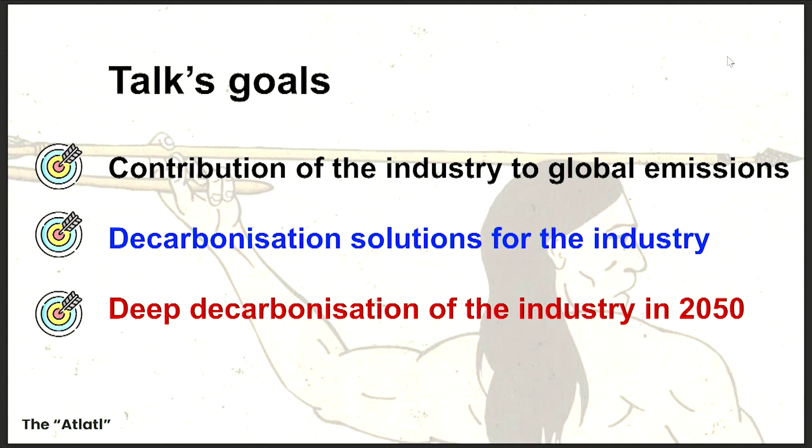In order to decarbonize deeply the industry, specifically in Europe, we need to think about other possibilities, not only applying renewable energy solutions, bio-based solutions or thermochemical solutions, but also thinking about what to do with the carbon that has to be removed or captured and converted into something of use. I will focus here especially on a few synthetic fuels.

I have included only two slides about what we do at CIRCE. I come from a technology center located in Zaragoza, Spain, but we also have presence in Brussels, as you might expect, in order to attract funding for our activities. We also work in different countries, especially doing projects for knowledge transfer to companies and other entities.

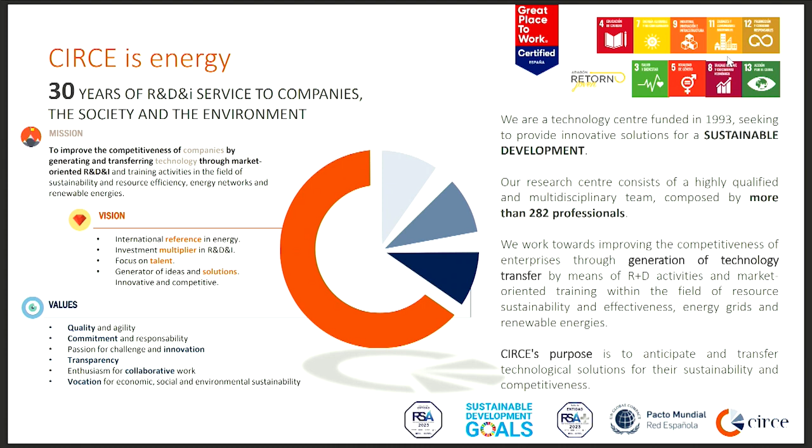CIRCE can be described as a very young research center, but we have, I would say proudly, a good history in technology transfer. That is our main essence. We identify technologies that are able to help the industry, mainly in Spain, as you might expect, but we also work with other companies in Europe.

What we do is mainly focus on three different activities. So as you know, we do some research. By doing this research, we produce knowledge that we can transfer afterwards to companies especially. And of course, we do an education part, in which we provide knowledge in different seminars or conferences like this one.

Just two slides about the project that is the main basis of this talk. The RE4Industry project is focused on identifying different renewable technologies to decarbonize the energy-intensive industry. It is a European-funded project, and as you might expect, since we are at this symposium for biotechnology engineering, many of the solutions useful for the industry are renewable solutions available right now, or that might be available by 2030, for the industry to decarbonize its processes.

When I say decarbonize, I refer to those processes that the industry uses and that require electricity and heat, which usually comes from fossil fuels. So the project is mainly focused on these different aspects, and we have conducted an analysis to see how the different renewable technologies you can see on the slide are available for the industry.

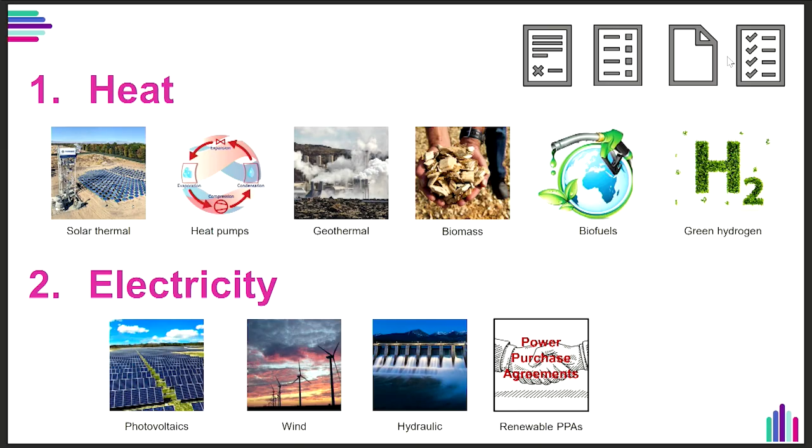We have also published a few results on this. As you might expect, we are considering different industrial sectors. Afterwards I will show a few slides on the most CO2-emitting sectors, but we have mainly focused on the steel and cement sectors. I will also show a few examples of how these technologies are applied in the steel sector, especially how CO2 can be captured in these sectors and converted into useful synthetic fuels, which are currently being produced at a few exemplary companies.

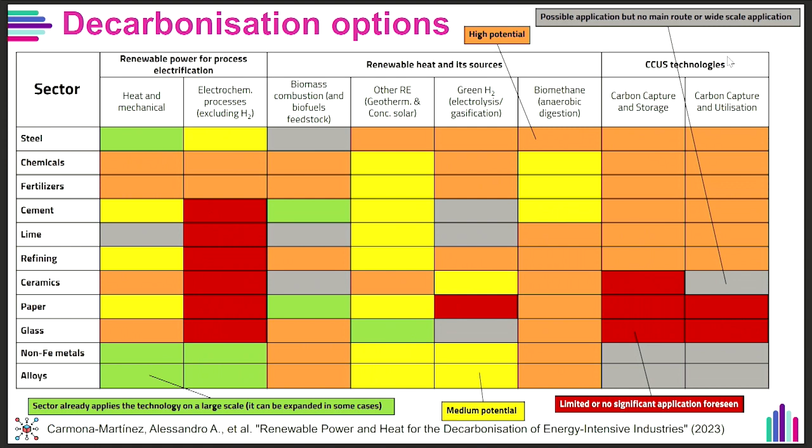This analysis is already available. You can download it and see the roadmaps that we have been analyzing in the project, and how the project has helped us to suggest identified roadmaps, or a group of solutions, that the industry will require in order to decarbonize the different industrial processes.

I will also start by giving a simple classification of different pathways for CO2 use. I'm aware that you are familiar with many of these technologies. Once the CO2 is captured, it can be used in multiple processes.

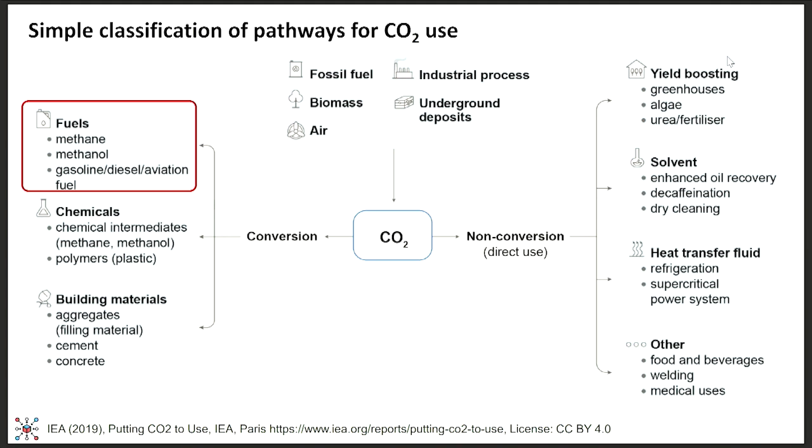The CO2, without any additional conversion, can be used, for example, in the food and beverage industry. We are aware of these applications, but carbon can also be converted to give additional value, and I will focus especially on a few of the synthetic fuels that can be used and are already being produced at the industry.

Of course, we have very interesting applications focused on the production of other types of chemicals, other types of bioplastics, for example, or also building materials. But these applications are out of the scope of this talk.

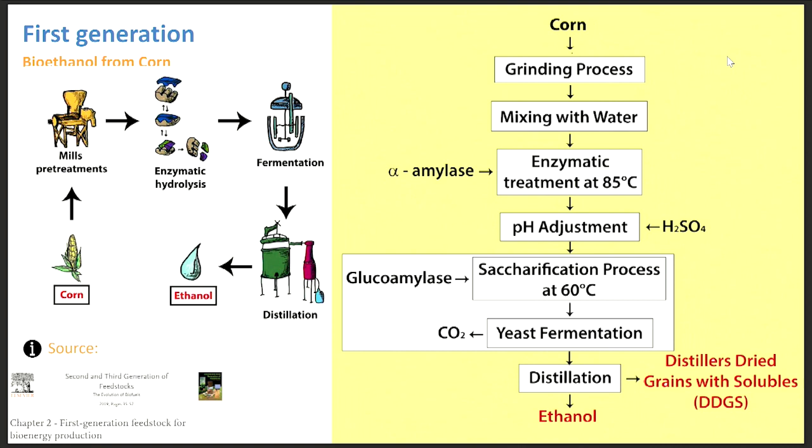It's something that Europe is trying to avoid in the following years. It is hard to do, but something that can be achievable. As you might expect, these biofuels have a dilemma of whether you produce food to feed the people, or you produce food crops to feed our cars. So this is the main dilemma of the first generation of biofuels.

Therefore, we need to focus on other alternatives for biofuels. There have been several talks today regarding the production of biofuels from biomass or from other industrial waste that can be converted into biofuels. However, as you might expect, CO2 can also be a good source, a good feedstock for biofuels production, and also for fuels that can be produced with thermochemical processes.

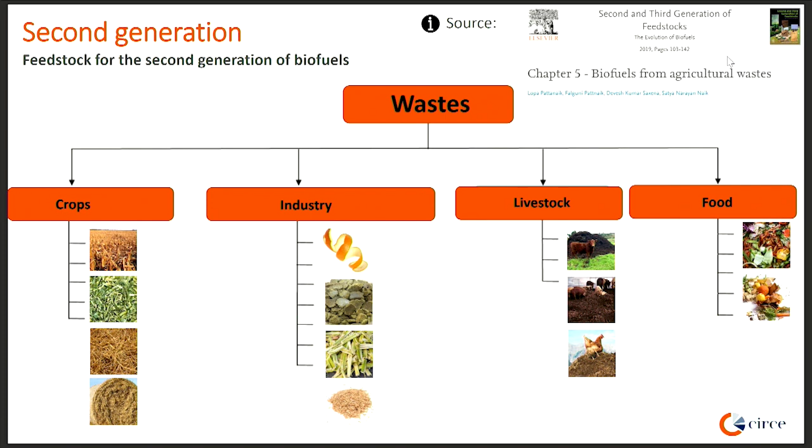For those who are not familiar with this second generation of biofuels, but I'm aware that many of you are, biofuels can also be produced from multiple wastes coming from crops, industry, livestock, and food. We have seen talks today coming from hydrogen, coming from food waste, biogas coming from sludge. So this could be the second generation of biofuels identified in this scheme.

Regarding the different technologies available for this biofuels production, we have biochemical conversion. We have seen as well a few talks for the production of hydrogen, biogas, and other types of fuels. But we also have other thermochemical conversion processes already available for the industry to use waste for the production of fuels.

Eric Travely told us a few hours ago regarding the gasification of biomass, if I remember correctly. That is a quite interesting option to produce hydrogen from biomass waste, agricultural waste, not to use biomass that can be used for other types of applications, but the option is there.

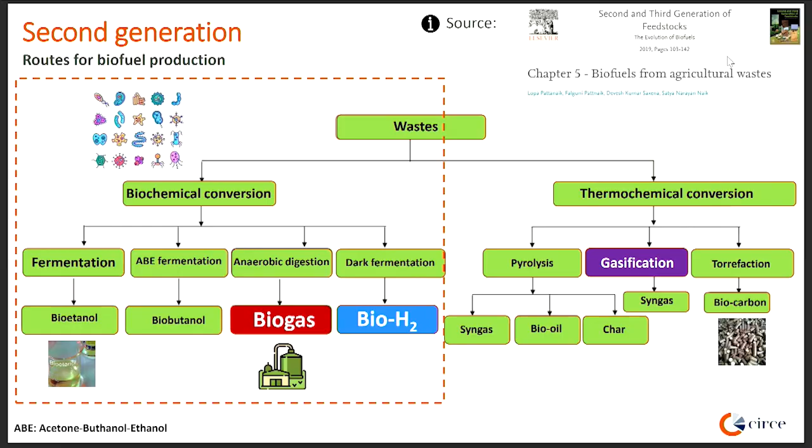Regarding another definition of more advanced biofuels, we have multiple microorganisms that can be engineered, modified in order to obtain biofuels or bioproducts. I will focus mainly on the biofuels that can be used by utilizing microorganisms and CO2 as a feedstock, which is, as I said before, an alternative for the industry to decarbonize its processes.

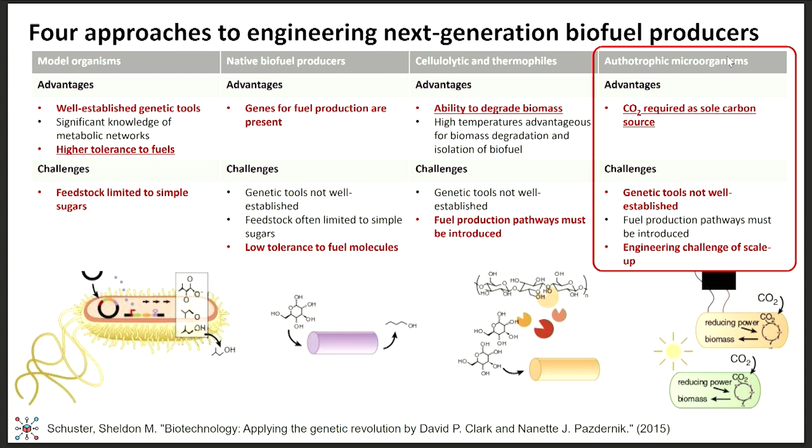So here we have an opportunity because genetics tools are not yet well available, but they can be developed in the following years. There also seems to be an engineering challenge for the scale-up of the technology, as Eric Travely mentioned before. But I will show you afterwards a few examples of how this has already been achieved and how we can all together put our efforts in order to bring this technology for industrial application.

I have to say that what we have analyzed in the project is mainly focused on Europe, but I'm aware that multiple regions in the world have the same problem, although they might tackle the situation in different ways. But the information that I will show you is mainly focused on Europe.

As you can see, the European Union has a very well established strategy in order to decrease these emissions by 2030 first, and by 2040 and 2050. So the European Union, for those who are not familiar with this, has set very ambitious goals in order to decarbonize completely its activities by 2050.

This is quite a challenging task because the technology is not yet available in order to accomplish this, but we will try to do it all together with solutions presented here today.

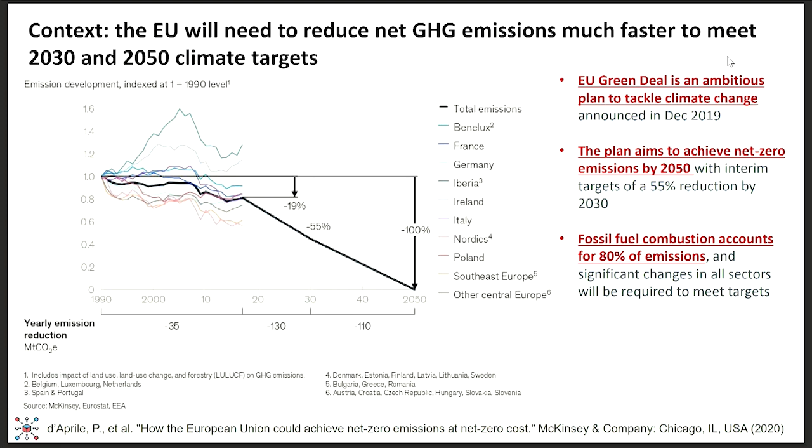As I said before, the different sectors in our daily life contribute to these emissions. What you see in the slide are the emissions from 1990 to 2019. As you can see in Europe, they have been decreasing slowly, but there is still plenty of things to do.

This project is focused on how to tackle the emissions from industry, especially energy-intensive industry. These are steel producers, cement producers, aluminum producers, and also the chemical sector.

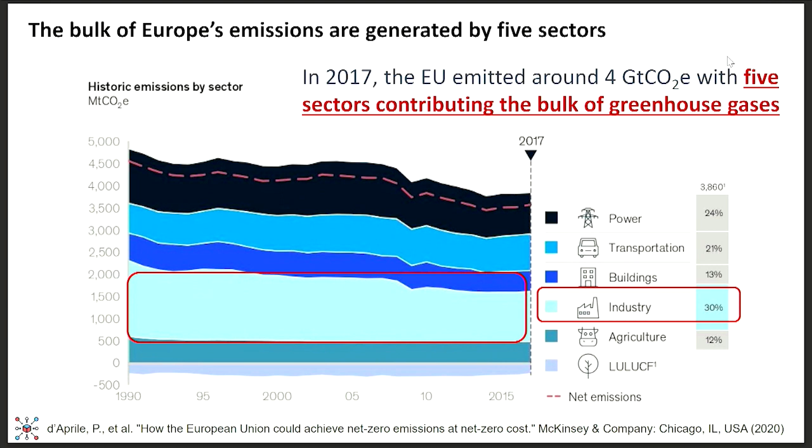What you see in the slide is the emissions of different industrial sectors in Europe. As you might expect, the cement and iron steel sectors produce the highest amount of CO2. Also the chemical sector and the extraction of oil and gas.

The project is mainly focused on industries that produce steel, cement, and chemicals. We have excluded the food and beverage industry and also the pulp and paper industry because they have already applied multiple solutions to decarbonize their process.

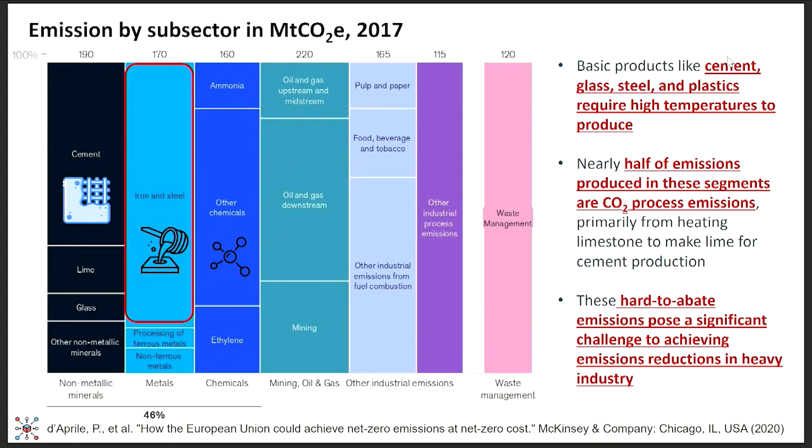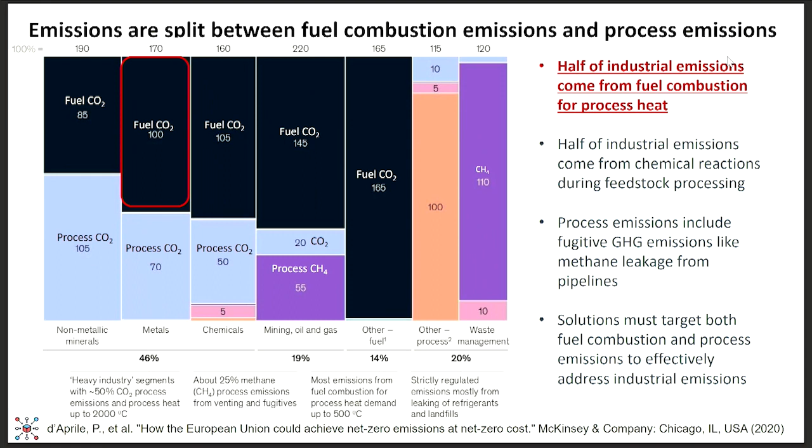From the different emissions in each industrial sector, an important part comes from the combustion of fossil fuel. So if you provide solutions to substitute the fossil fuel they currently use, you are tackling a very huge problem of the industry, as you see in the slide.

Some of these solutions I have shown already in previous slides. We are considering different types of renewables and how this can be implemented at the industry. But there are also other solutions that in the long term, 2030, 2040, 2050, can be applied to deeply decarbonize the sector, because the industry can substitute certain fossil fuels.

For example, biomass, which is highly debatable in Europe, but it seems to be applied soon by many sectors. But other technologies are required, because biomass or other biofuels have a limitation of availability. So you need to provide solutions different from the ones already available.

Some of these solutions are based on the production of additional biofuels from CO2. First of all, you need to retain those CO2 emissions and make use of that CO2 in the production of biofuels that can be used at that specific industry or by another type of sector.

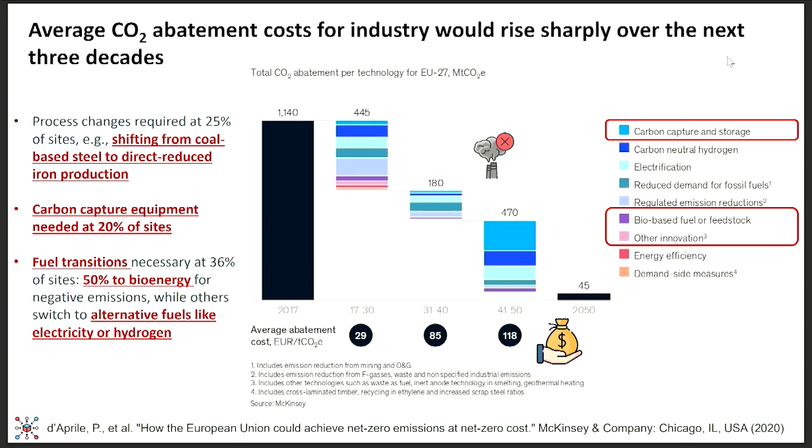Now we come to our good friend, hydrogen. We had a few talks before regarding hydrogen. I have been working with hydrogen, or I will say I have been in contact with hydrogen experiments since my studies at the university.

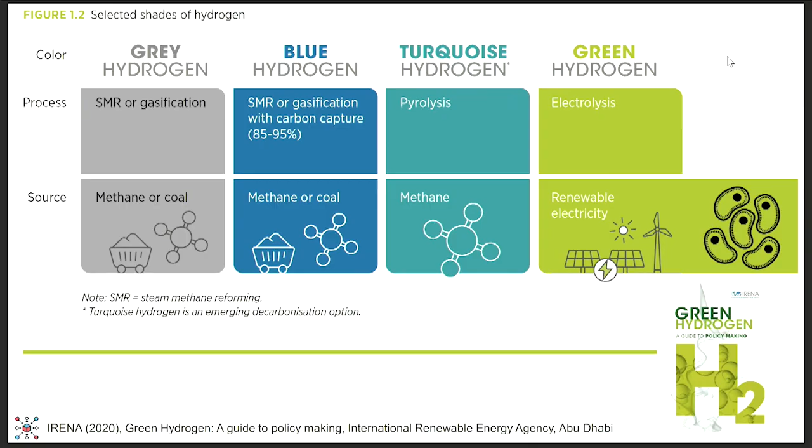It has been promised in 2005 that hydrogen is the future, the fuel of the future. So far, into 2022, we have not seen, sorry Eric, we have not seen any industrial application, hopefully we will see it, but we haven't seen any industrial application for biohydrogen production. I hope I can see it someday, but it seems to be getting harder to bring it to that level.

I wanted to include this definition of the different types of hydrogen that we can find, because to really decarbonize something, we need to provide synthetic fuels that are a product from captured CO2 and hydrogen, green hydrogen, which is mainly produced by electrolysis processes or other types of processes that do not use fossil fuels in the production of that hydrogen.

I must confess that the analysis of the availability of renewable power for the production of green hydrogen is highly dependent on the region you consider in Europe, because although all countries have a certain amount of renewables, for example Spain has quite a huge amount of photovoltaics and also wind, less wind than photovoltaics. So Spain, at least, seems to be one of the front runners in the production of green hydrogen coming from 100% renewable energies.

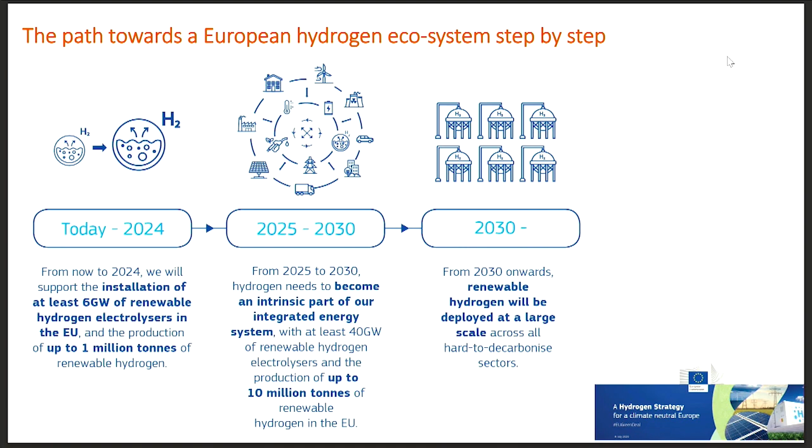That's why there might be an advantage there to produce this hydrogen that is required for the production of synthetic fuels.

One of the issues is that green hydrogen nowadays is quite expensive, at least for the industry. They are not willing to pay that much, or that price of around 10 euros per kilogram of hydrogen. They are willing to pay less, expecting a price quite cheaper than that, around 1 euro per kilogram of hydrogen.

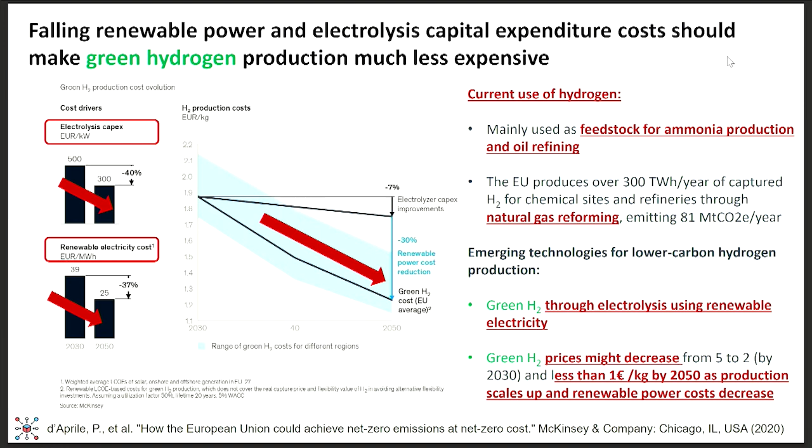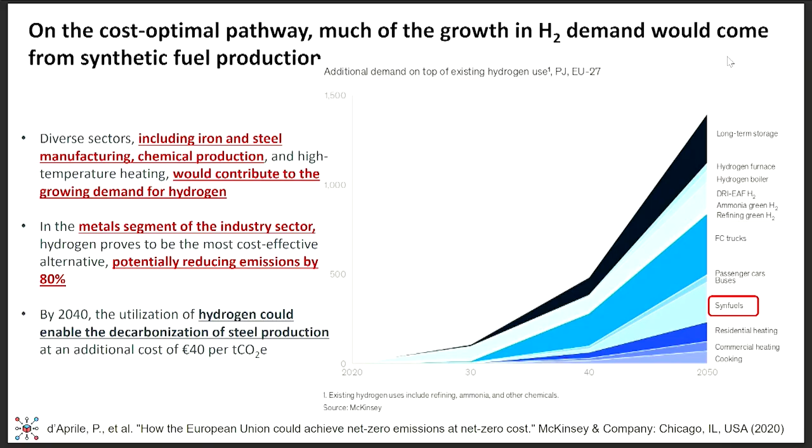This will be mainly dependent on the development of renewable power available in the continent. However, one of the main possibilities for hydrogen to be cheaper in the coming future is the development of other technologies that require hydrogen as feedstock. So here we see an opportunity, at least in the analysis we have conducted in the project, to see the reduction of green hydrogen price in the coming future as a feedstock for synthetic fuels.

I have already told you the different industrial sectors we are considering for our analysis, but we are mainly focusing on those sectors that do not have a very specific solution for decarbonization. We focus on sectors that produce huge amounts of emissions with high CO2 content. Here you can see three sectors: cement, steel, and chemicals. They currently produce a huge amount of emissions with high CO2 content, which can be an opportunity for the industry to focus development efforts on these three sectors, at least in Europe, since they have high CO2 concentration in their emissions compared to other sectors.

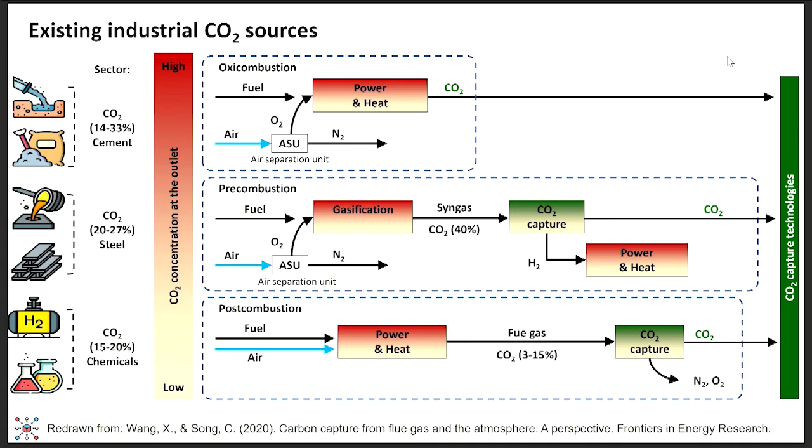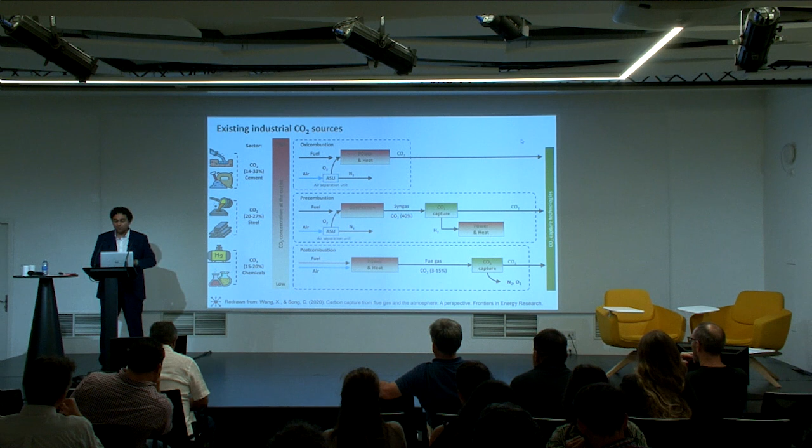The good thing is that many technologies for capturing CO2 are already available. Our colleagues working on gas fermentation or gasification might have additional information, but CO2 capturing technologies are at a commercial stage and already available for industry application. We should focus on technologies able to produce higher concentrations of CO2, like oxy-combustion, pre-combustion, and post-combustion. This depends on the sector being analyzed, but we must focus on capturing that CO2 and using it for additional processes.

As you might expect, thermochemical processes are already available at a commercial state. They are already applied in industry for the production of hydrogen and CO2 from fossil fuels, and can be applied for the production of additional synthetic fuels without the need of microorganisms.

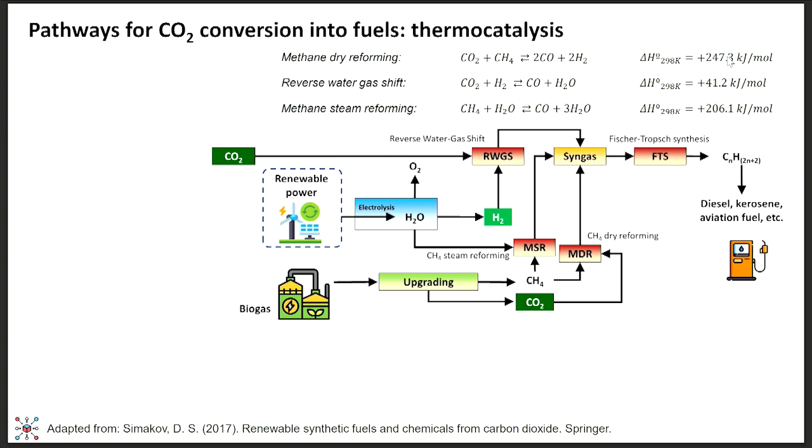But since we are in a biotechnology conference, let's talk about biotechnology-related processes. I won't talk about very advanced or very novel processes—these are well-known processes to all of you.

So we have gas fermentation, which colleagues working in that field are quite familiar with, and also hydrogenotrophic methanogenesis, which is also quite well available. They can be used for the decarbonization of the industry. As long as we have a good CO2 source and green hydrogen coming from renewable technologies, we can make these two synthetic fuel production processes more available for the industry.

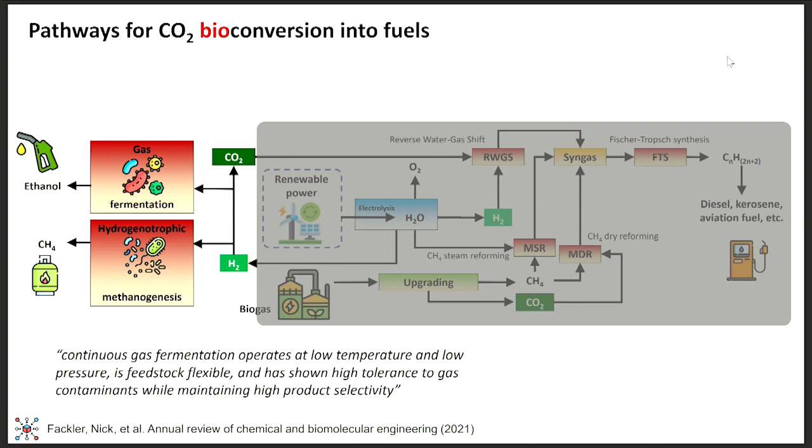Here we have an advantage from the biotechnological point of view: we have multiple microorganisms. I'm aware many of you work in different fields utilizing different microorganisms that can be used to produce synthetic fuels. They have advantages and disadvantages, but if we complement how these microorganisms work, we might have multiple microorganisms producing different synthetic fuels. I will focus mainly on those able to produce synthetic fuels from CO2.

One aspect mentioned today, and that I've seen in a few posters, is the use of microbial electrochemistry for the production of synthetic fuels from CO2.

Although I have worked here in the past with our colleagues from INRA and Narbonne with these types of systems, nowadays I'm not 100% sure whether this can be fully applied at an industrial scale. Although these systems are quite interesting from the biological and electrochemical points of view, the research required to bring these technologies to industry within the next 5 to 10 years might not be enough.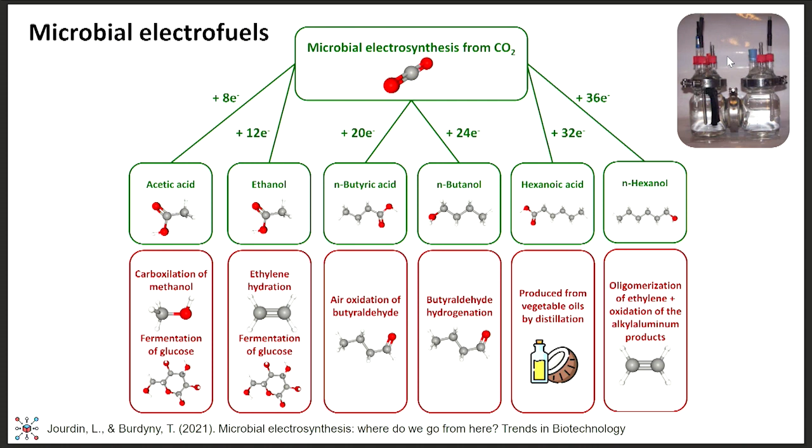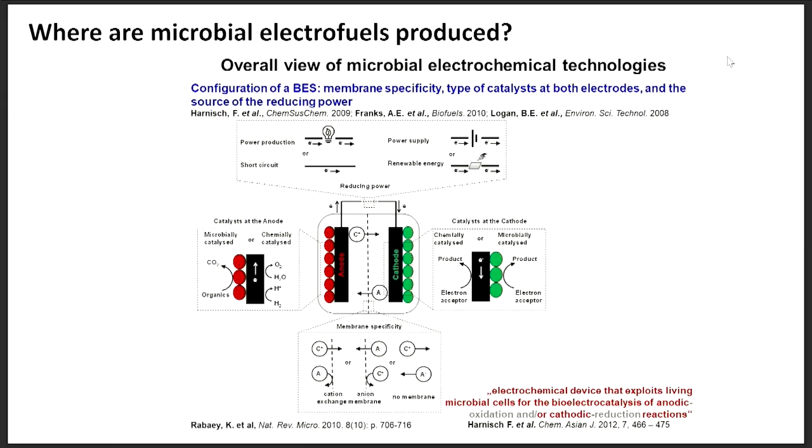But the technology exists. Microbial electrofuels are produced—molecules produced using a bioelectrochemical system. You have already seen a few slides and posters on this. A bioelectrochemical system evolved from fuel cell systems, in which you use microorganisms instead of hydrogen as a fuel.

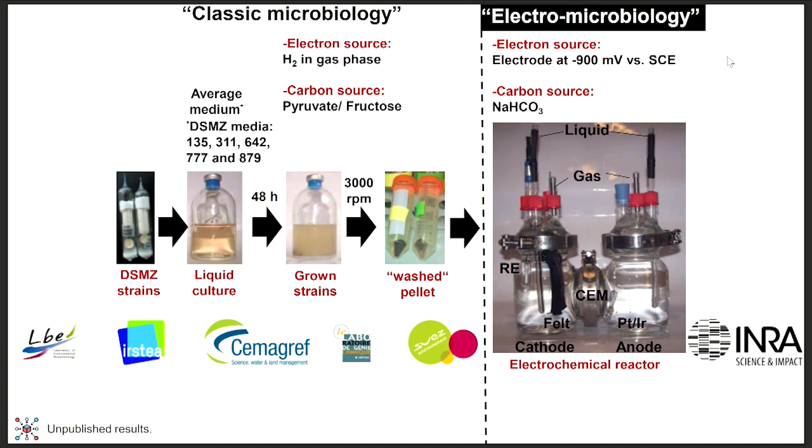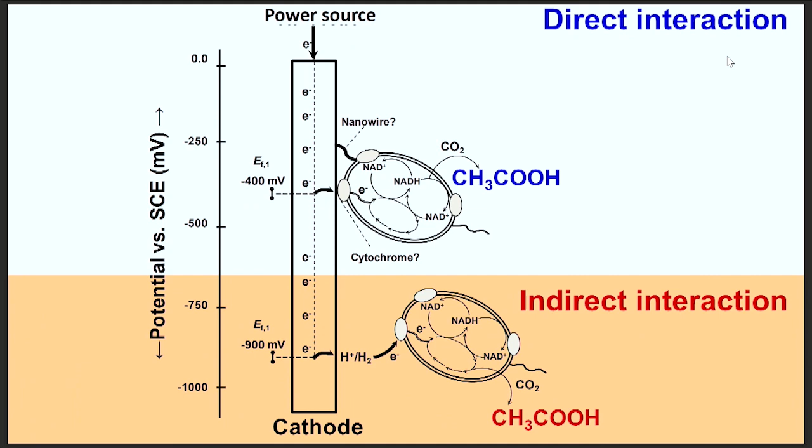I apologize to my colleagues because I've included a slide of unpublished results—I hope we can publish them soon. But this should give you an idea of what a microbial electrochemical system is. Finally, a few of the main gaps in this technology concern how these microorganisms interact with the electrode. That's why I said we might need several years to fully understand and bring this technology to industrial applications.

However, the concept is there: we can try to combine CO2 with renewable power to produce synthetic fuels with this technology. Afterwards, once we've produced a very simple molecule, we can try to elongate it to produce additional, more interesting molecules, specifically for the fuel sector.

But we will see—there are different groups, like the group from Argentina, applying all this knowledge in order to bring this technology to industrial scale.

The example I wanted to share with you regarding the industrial application of synthetic fuel production is the one you can see in the slide. This example has been applied in Europe and also in China, if I'm not wrong, by a company.

They have applied the capture of CO2 from the production of steel. That CO2 stream is clean, and afterwards is fed to a bioreactor in which they have a culture of Clostridia. Probably you are aware of this example. You can find it in Belgium.

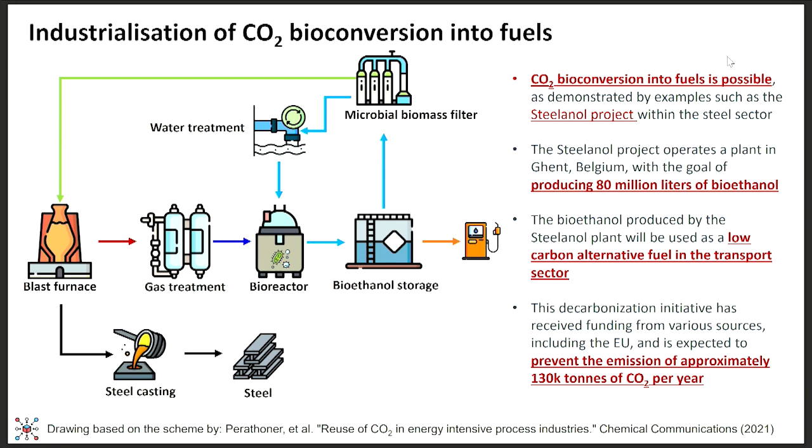So we have here a very nice example of how this can be achieved. And if you need additional information, you can have a look at the MUSIC project, which is as well a European funded project. You can see here on the slide the picture of the company, of the plant.

As I said, this is not basic research. This is not a pilot scale project. They have already applied this. We have visited the place, it's quite interesting, and you can find pictures of this example online. So they have already completed the plant, and they have already been starting producing that ethanol from CO2 emissions.

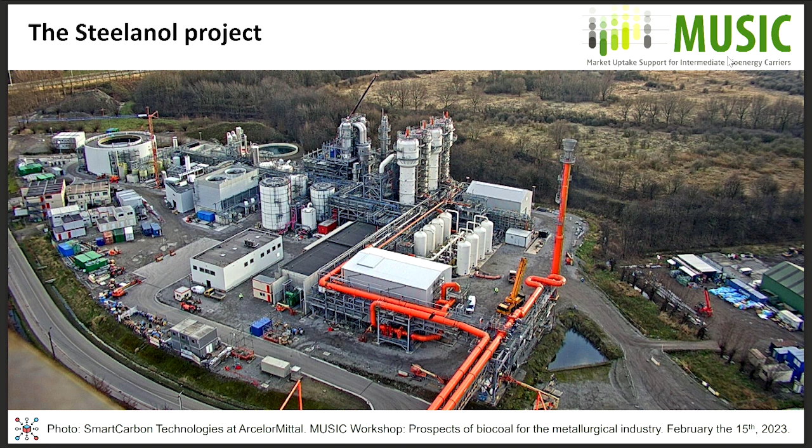So we are closer to bringing those solutions that are required for the sector. This is one of the examples that they have allowed people to publish regarding the operation of this type of reactors. As you can see in the example, 100 days of operations is quite a good example of how robust this type of system is.

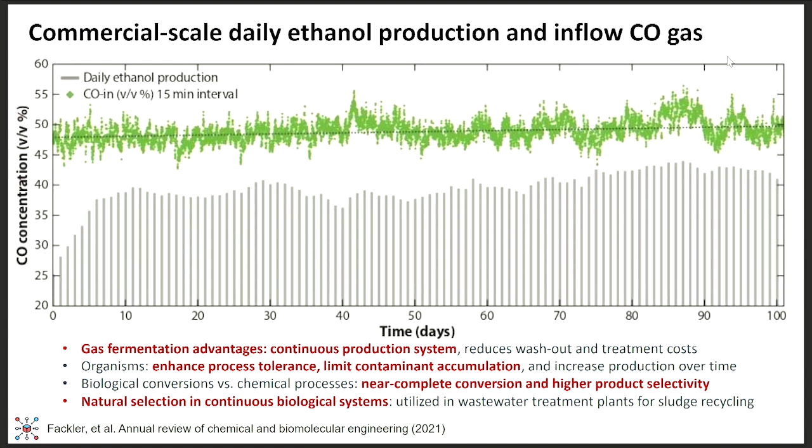And you can see here as well the feeding of CO and also the constant, stable production of ethanol. So another example of the success of this type of biotechnological application for the production of synthetic fuels required for the industry, for the decarbonization of the industry.

The final example I will share with you, this is something that people working mainly in Europe, close to Germany, are probably aware of. This is a company which claims to produce additional biomethane from the mixture of CO2, which can be industrial CO2, combined with hydrogen, renewable hydrogen. So this type of solution can also be applied to the industry in order to decarbonize the sector.

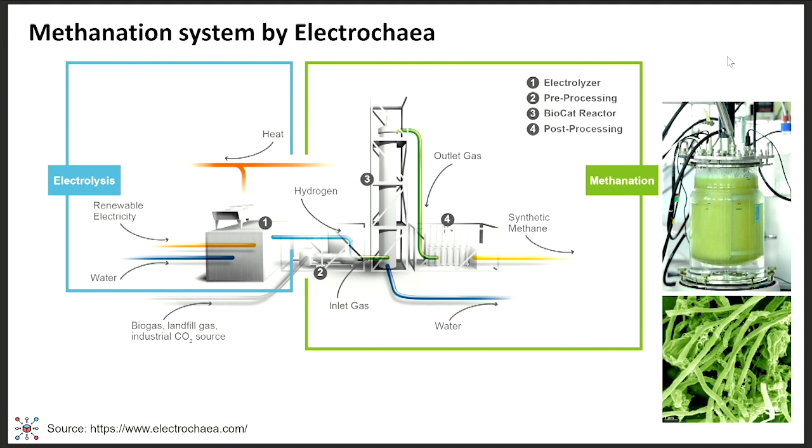I would like to finish with a few takeaway messages. The CO2 utilization through different microorganisms is a very promising technology, and also an available technology for the decarbonization of the industry.

I didn't talk about microalgae, but microalgae are as well a really nice group of microorganisms, able especially for the capturing of CO2 into biomass, which can be used additionally into the production of biogas in anaerobic digestion. We have as well all type of lithoautotrophic microorganisms for the fixation of CO2.

Although many of these microorganisms are not available already for industrial applications, we have them, we know them, and since we have certain tools to modify these microorganisms, we have plenty of possibilities to capture CO2 and convert that CO2 into synthetic fuels.

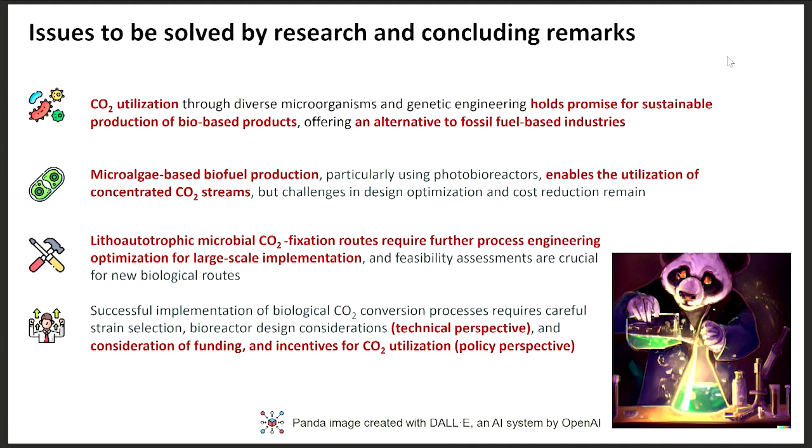Finally, something I didn't mention in the talk is that in order to successfully apply all these types of technologies, we require, of course, the technology to be available and developed at the industrial scale, but also the policy framework, which I admit is quite a boring topic to talk about, but the policy framework should be quite well established in order to successfully apply all of these technologies.

I will finish with an open invitation for those that are involved in the development of solutions for the decarbonization in the industry.